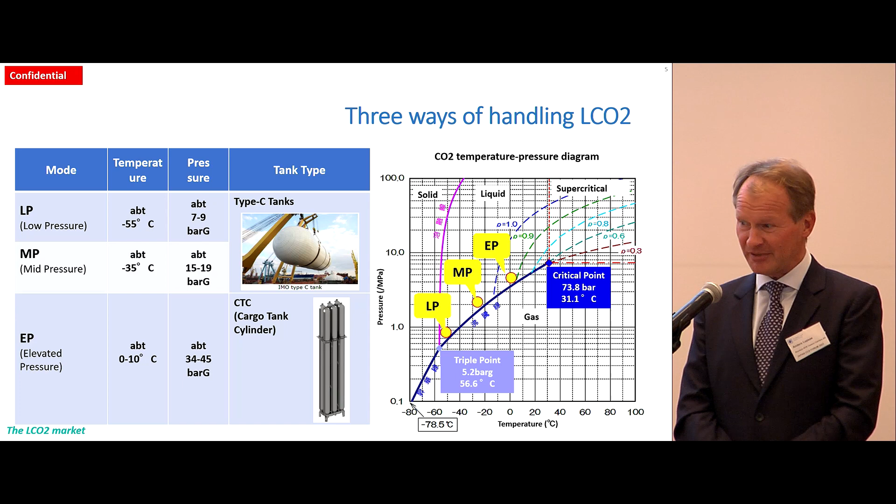This is a new business venture. We are owned by Knutsen of Norway, which is Norway's biggest ship-owning company, and by NYK, being the biggest ship-owning company in the world. And the only thing I know is that if you're going to grow a company into new industry where the technology is under development, you need strong and long-term owners. And you also need capital-rich owners, because this is going to take time. And once we start to order and operate vessels, it will be quite costly, capital intensive in order to grow this business.

When we look into the market prospects that we as a company have already today, over the next 10, 20 years, I wouldn't be surprised if we had to build more than 100 vessels based on what we see today. And the only thing I know is that number will grow going forward. What is also important with the owners here is that they are cooperating within shuttle tanker business, i.e. loading oil offshore. And the competence and knowledge based on that business is really suitable for our company as well, since we are also promoting and offering vessels for direct injection offshore that I just showed you.

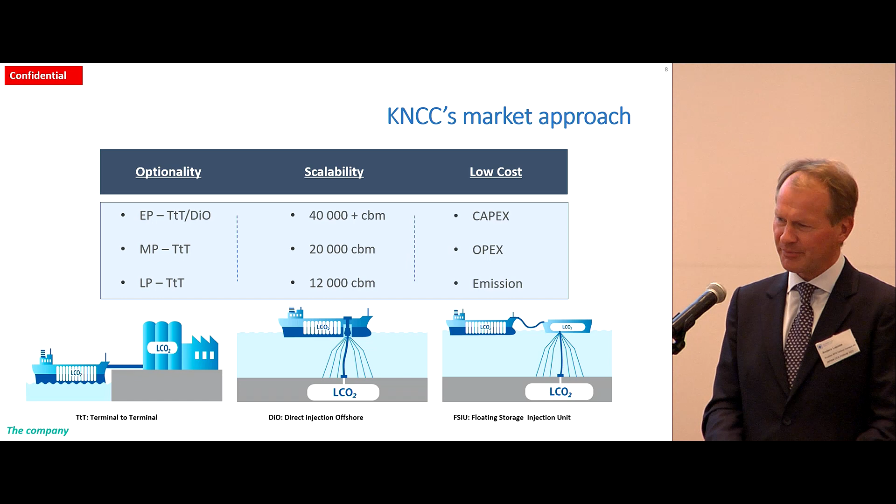This is our offering. I'll keep it very short. The basis here is that we provide optionality, we provide scalability, and we provide low cost. And that is what the CCS value chain needs from our point of view. It's so important to keep in mind that this is, in many ways, waste management. And if you're doing waste management, you have to keep the costs low, and you also need to obtain scale. Otherwise, it's very difficult to achieve commercial viability of the various projects. Next, please.

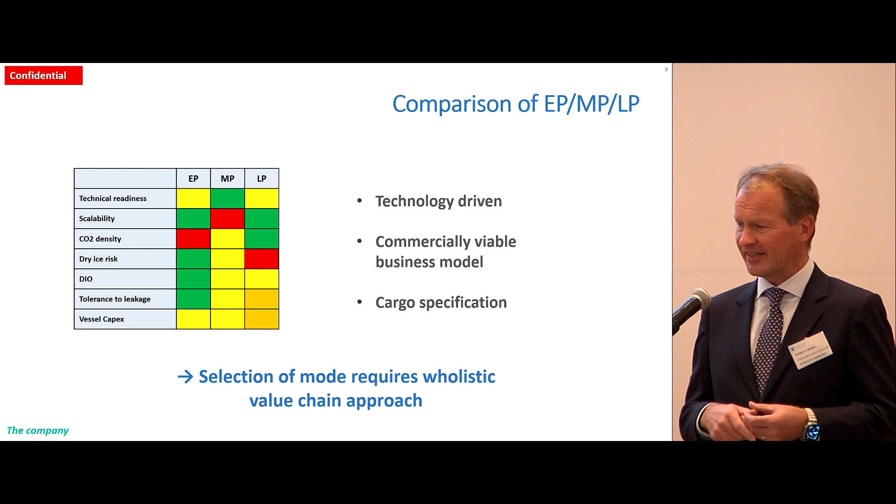And this is an industry where, in many ways, we have started in the wrong end, because we are considering investments, huge investments in CCS value chains, but we still haven't reached an overall agreed definition of the cargo. And that is something that is really important that we are able to do, particularly since CO2 is such a delicate cargo. Next, please.

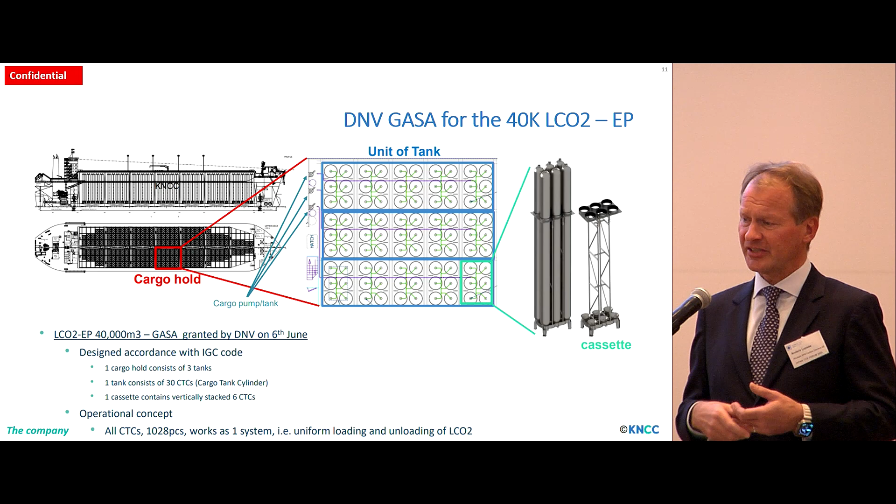I showed this before. You can show the next one. This is the containment system that we are using to carry the CO2 in elevated pressure, ambient temperature. It is really not as complicated as it looks. It's vertically stacked pipelines connected together. And in reality, it's one tank in the vessel that enables loading and discharge in parallel across the vessel as such.

Next, please. In addition to building and operating vessels, we have understood that in order to do this in a proper way, we need to develop the CO2 knowledge for how to handle this on board a vessel. So in Norway, 15 minutes away from our offices, we have built the CO2 test rig, where we are testing thermodynamics of the CO2, how it reacts when you move it from one cassette to the other cassette, duplicating in many ways how CO2 reacts when you're moving it from a terminal to a vessel and back again. And this has provided us with what we refer to as deep knowledge about CO2, which is very important.

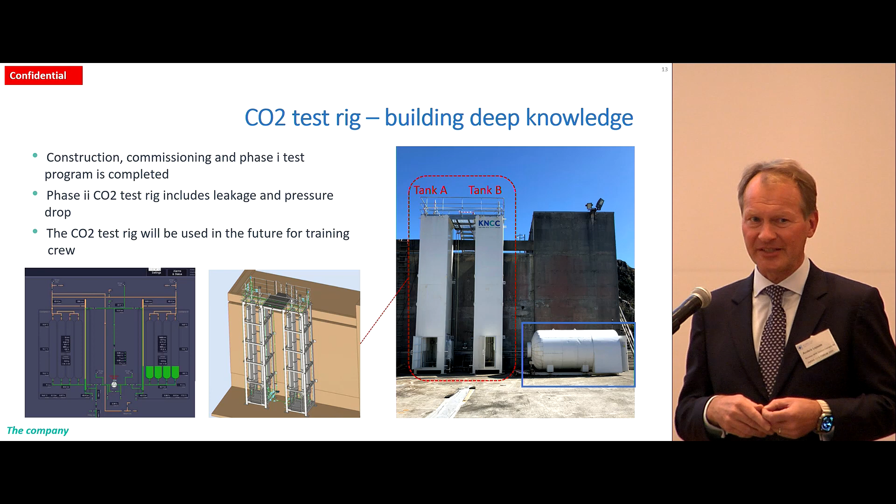But also keep in mind my predictions about how many vessels we will be needing for CO2 transportation going forward; think about all the crew that we will be needing on board vessels. And nobody has experience with handling CO2 in the volumes that we are going to do. So we plan also to use this test rig as a training site for crew on board our vessels, enabling them to gain the understanding and see what can happen if something goes wrong. So we are doing leakage testing, and all kinds of useful experiments in order to understand CO2 as best as we can. Next, please.

So we have been a company in operation for close to 2 years now. We have gained GASA, which is a general approval for ship application of our containment system from DNV, the Norwegian Classification Society. We have done our HAZID. We have demonstrated the elevated pressure technology with the test rig, and we are engaged in 30, 40, 50 projects on a global basis. So we have achieved quite a lot over the last close to 2 years.

And the only thing we know after being in the market for such a short period of time: this market is enormous, and the volumes that will be available for shipping and storage... it's a new business, it's a new industry, and for us, it's a new shipping segment in the making.

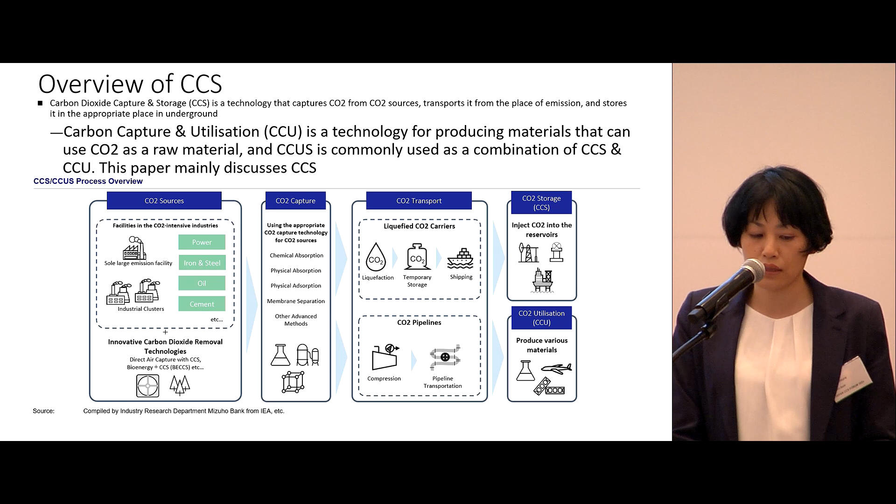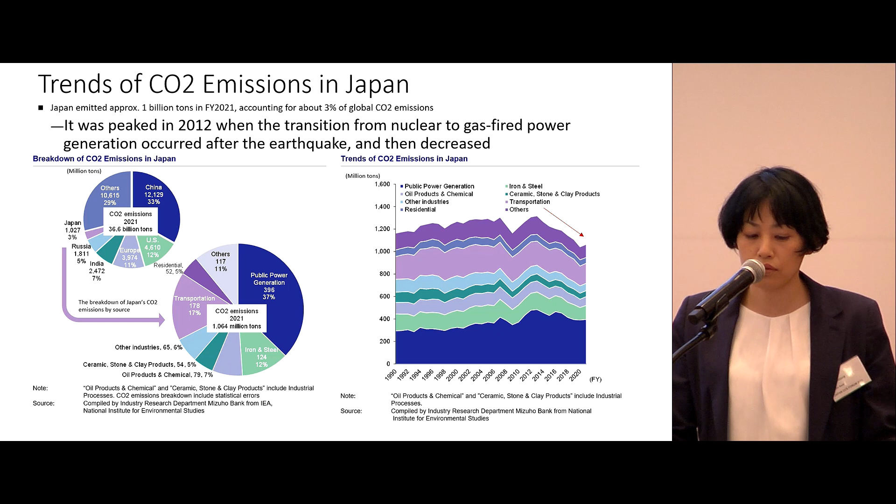Next page. Globally, what's the level of Japan's CO2 emissions? Japan accounts for 3% of global emissions, and power, iron and steel are the major emitters. Moving to the right. After the earthquake, after the shutdown of nuclear power plants, the thermal power generation ratio went up. 2012 was the peak, and it has been declining since then. Next page, please.

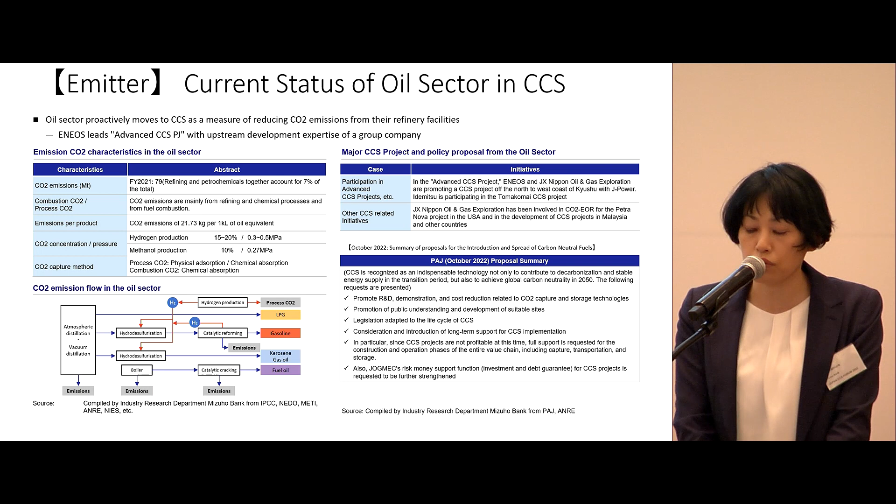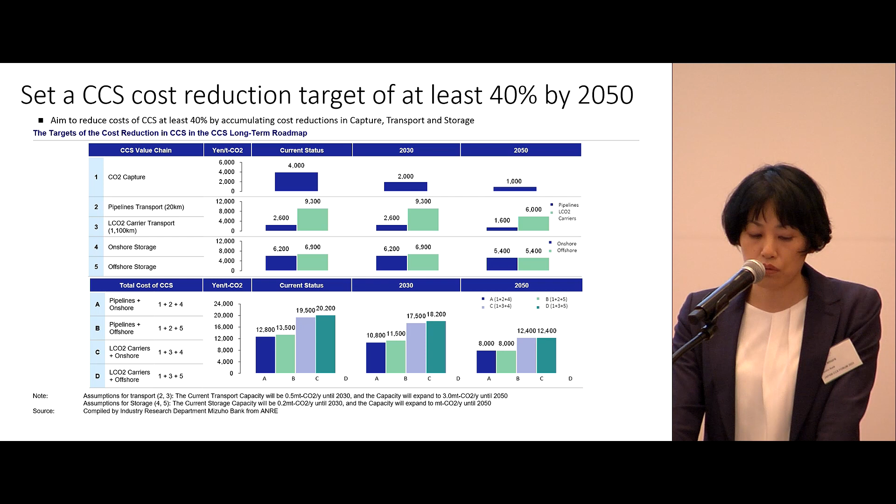On CCS, currently the cost is expensive. I think that's one of the issues. So going forward, to what extent can the cost be reduced? For penetration, that's one of the important matters, particularly number one, CO2 capture. If it could be brought down to 1/4 compared with the current level, then the overall cost can be reduced by 40%. So people are paying attention to this. Next page, please. That's page 8.

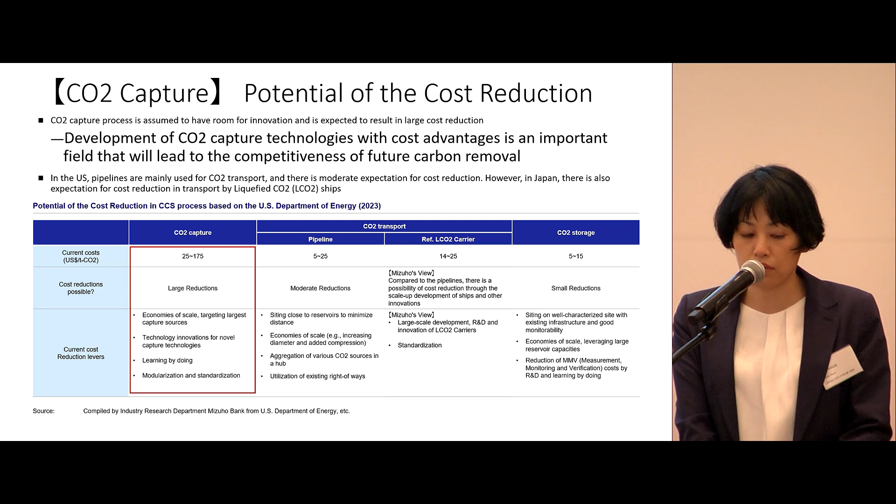Next page, please. Cost reduction. As I shared with you before, CO2 capture is where the highest expectation lies in terms of further lowering the cost. But other than that, in transportation, of course, cost needs to be reduced. Currently, in terms of technological development, CO2 capture is the focal point.

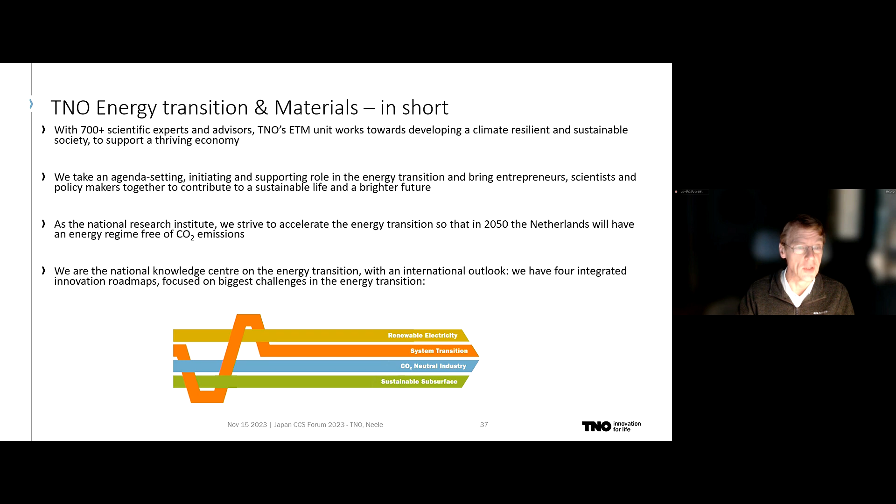And I am in the unit Energy Transition and Materials, next slide, please, which again covers many topics in the area of energy transition. We do wind, sun, geothermal energy, and also CO2 capture, transport, and storage. Next slide, please.

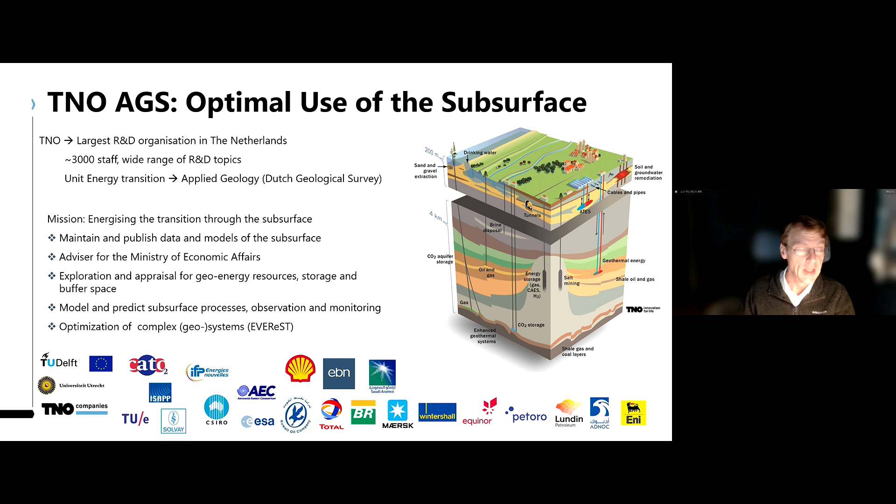Our team is the Applied Geosciences team, AGS, which covers the topics dealing with the subsurface. So we are the Geological Survey of the Netherlands. We maintain and publish data on the subsurface. And we also have been doing research in the area of CO2 storage. Next slide, please.

Our team has a long history in CCS. We've been covering all the geotechnical topics that are required in the area of CO2 transport and storage. And one of the things I would like to mention here is that in recent years, we have been involved in the Porthos CCS transport and storage project that I will talk about in a minute.

And we have done a large part of the work that has gone into the storage permit applications that are now in place and that will be used by the Porthos project as a basis to construct the project and start operations in a few years. Next slide, please.

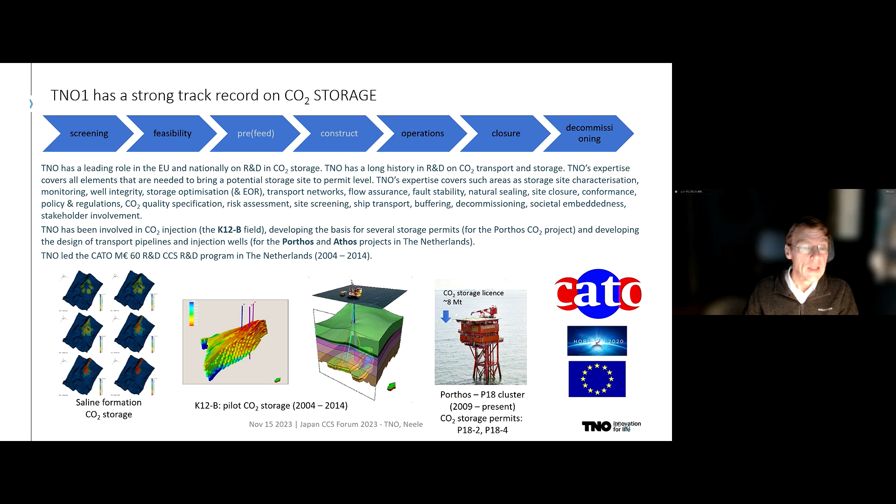So moving to my actual presentation. In the Netherlands, CCS has been recognized by the government as a necessary technology during the energy transition, and a necessary technology in the short term to meet climate goals. So it is present in various key documents set up by the government, which sketch the role of CCS to meet emission reduction goals by 2030 and 2050.

In our country, the focus for CO2 storage is in the offshore. There has been public resistance to storing CO2 onshore, and as a result, now everything is happening offshore. It so happens that our country has a large number of gas fields offshore, and there are about 100 or so fields offshore that are likely to be suitable for the storage of CO2.

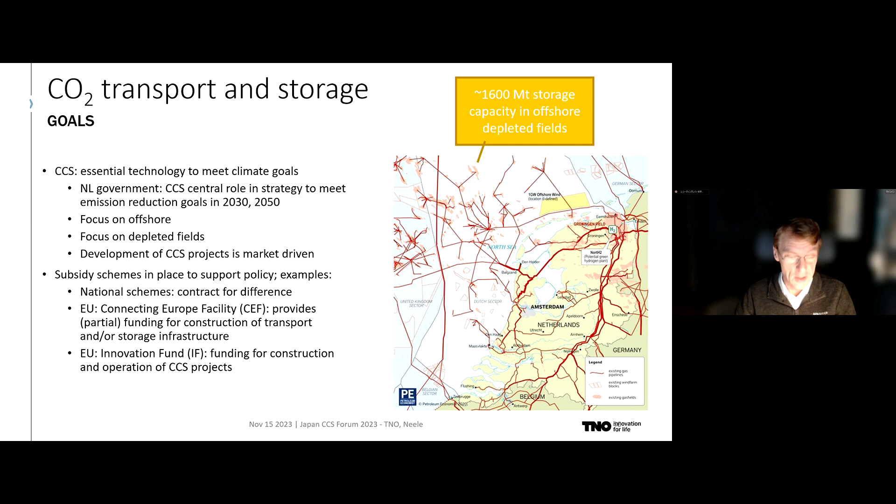At the European level, the projects can use, for example, the Connecting Europe Facility, which provides funding for projects to construct transport and/or storage infrastructure. Also present is the Innovation Fund in Europe, which provides significant funding for the construction and operation of CCS projects. Next slide, please.

Porthos is about connecting emitters in the Rotterdam port area, a large industrial area, to an offshore cluster of relatively small depleted gas fields. The gas fields have a total combined storage capacity of close to 40 megatons, and the project aims to inject CO2 at a rate of 2.5 megatons each year. Four emitters in the port of Rotterdam will supply the CO2, and the project plans to start operations in 2026.

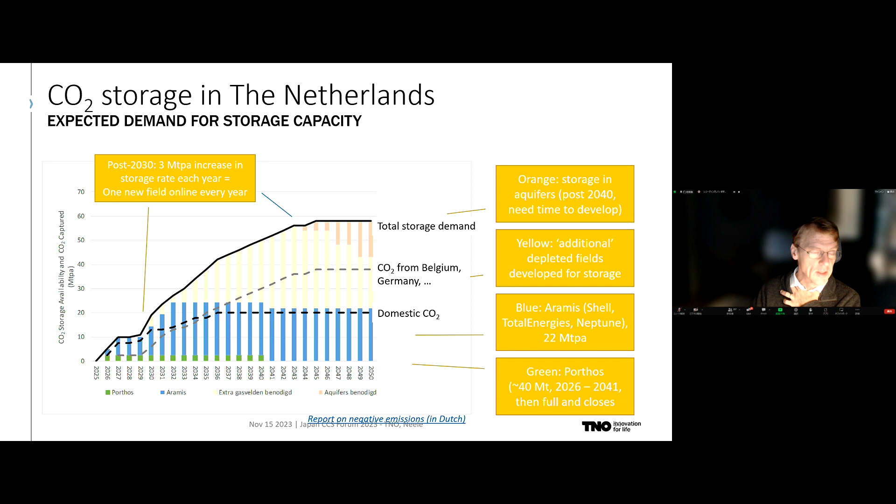And this is aggressive, but not totally unrealistic. And it shows the level of effort that is needed in the Netherlands to keep up with CO2 storage capacity demand from both the Netherlands and neighboring countries. Next slide, please.

So currently ongoing in the Netherlands are several transport and storage projects, and I can say that these are quite exciting times, with the first project now well past final investment decision and well on its way to construct and operate by 2026. We have several other projects that will start operations before 2030, and storage rates in these first projects will already be above 10 megatons per year. So in the Netherlands, we intend to go from 0 today to 10 to even 15 megatons on a yearly basis.

And that means that we will have several of the world's largest storage projects in our offshore area. There will be a significant task ahead beyond those projects post 2030 to keep up with the expected demand for storage capacity, and the sort of task that is ahead is of the order of one new depleted field coming online for storage each year. And I think what needs to be done in the coming period is for industry to remove the remaining issues, to put together best practices, and to speed up licensing. And with that, I thank you for your attention.